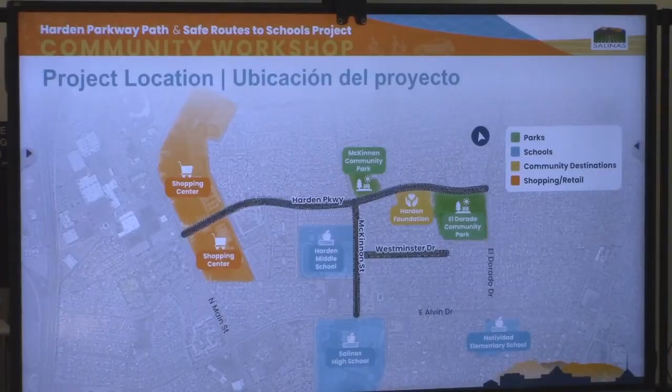This is the Harden Parkway Path and Safe Routes to School project. I'll start with an overview of the project. It does include all of Harden Parkway, from Main Street all the way to El Dorado Drive. And then it also includes McKinnon from Harden Parkway down to Salinas High School and Westminster.

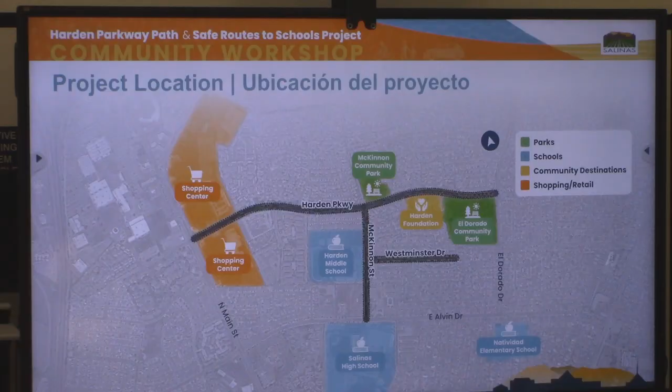North Salinas, right. So the project overview: this project really started during the development of the Salinas Safe Routes to School plan in 2022. During that time, Monterey County was also developing their active transportation plans, so I'll touch on those. We've got some really direct improvements that came from those plans. From there, we worked with the city to submit an active transportation grant application. Actually, this needs to get updated - we won more than 8 million, closer to 16 million, to fund the design and construction for this project.

Subsequently, we completed an intersection control evaluation. I'll go through the details of that, but essentially it's a benefit cost analysis looking at different intersection control types to see what would give us the greatest return on investment. We are currently working through the environmental clearance process and concurrently working through the public outreach and preliminary design. We did have an outreach meeting in October, and this is the follow-up to that. And later this year, we will be doing the final design for this project.

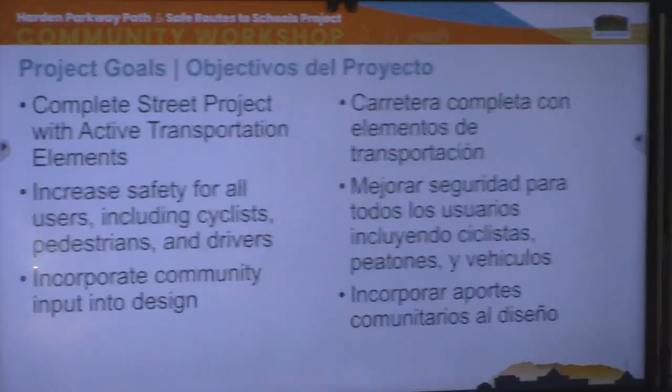So, project goals. As I mentioned, this is funded through the Active Transportation Program. As part of that, there are improvements geared towards cyclists and pedestrians, but we also want to consider drivers as well. So this is a complete street project, meaning we're addressing the needs of all users. With the proximity to the school, some improvements are right outside, so we really want to pay attention to the needs of students. During this process, we want to incorporate community input into the design.

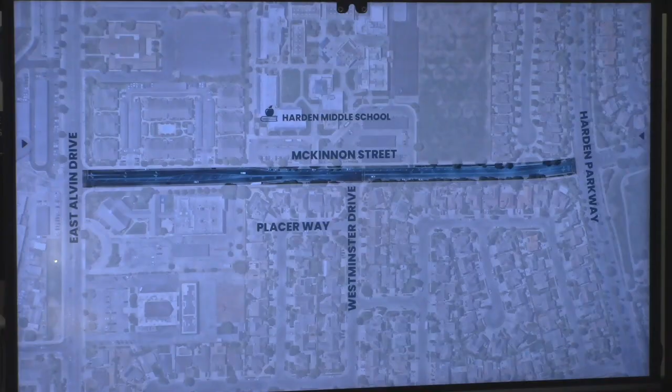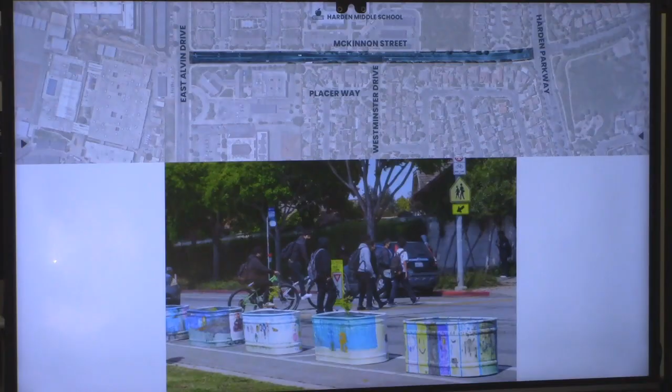So I'll go through each of the different segments. This is the segment out in front of the school on McKinnon. As part of the Safe Routes to School plan, there were some pilot installations, including raised planters to define the bike lanes and add more protection for students going to and from school. This is the existing cross-section, with bike lanes on the sides and a striped buffer. This project will make those permanent and protected, with an actual raised element to keep cars away from cyclists.

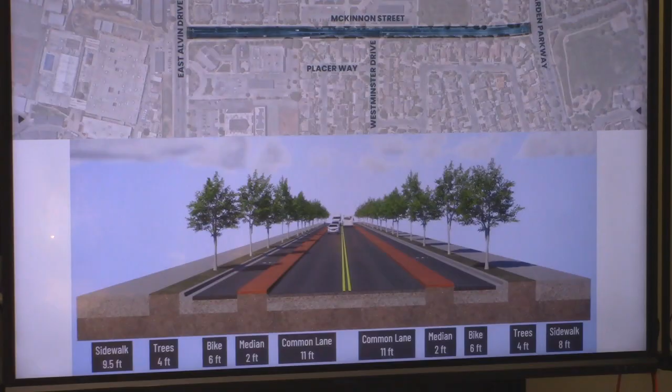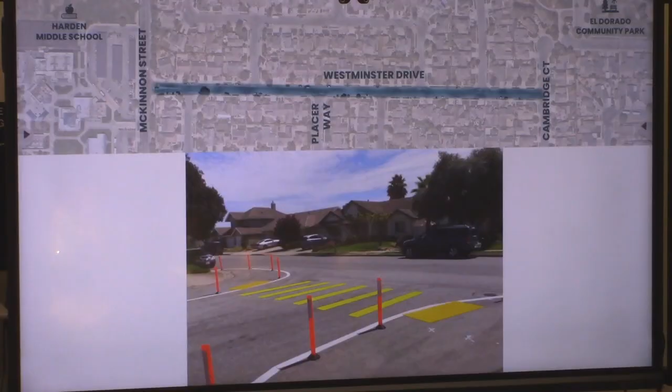The next area is on Westminster Drive, between the school and El Dorado Community Park. Again, as part of the Safe Routes to School plan, there was an installation of painted and striped curb extensions and high visibility crosswalks. These do a few things: they create shorter crossing distances, and the curb extensions also help slow cars down. This project will make those permanent as well.

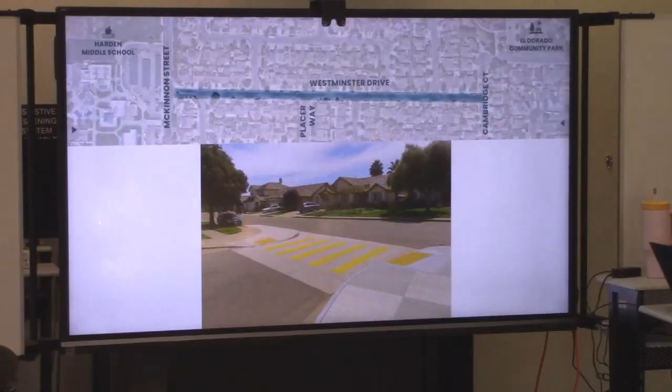And then finally, we come to Harden Parkway. This is the largest portion of the project. As part of the grant application, we included a single-lane roundabout at Harden and McKinnon, and also lane reductions along Harden. This is the existing roadway section now - you can see there's 2 lanes in each direction, a wide median in the center, and then 4-foot bike lanes on the edge.

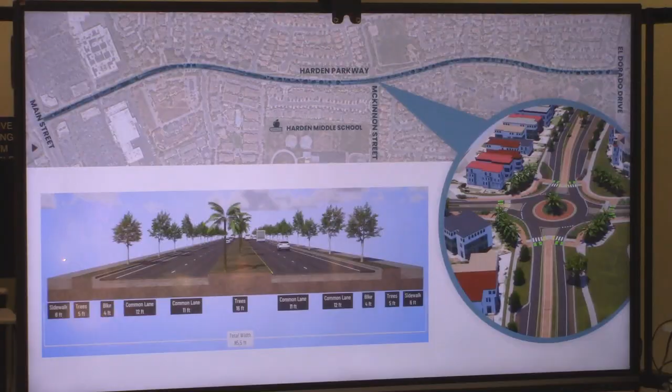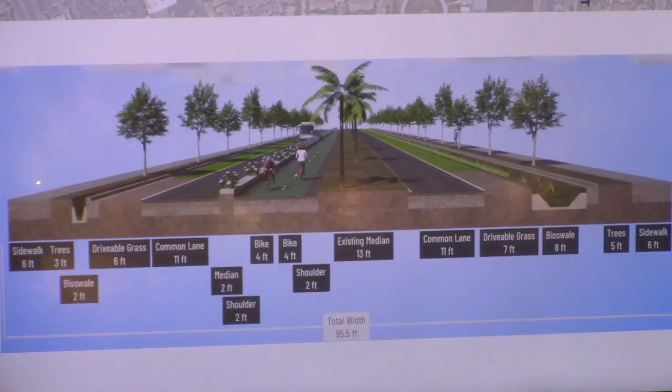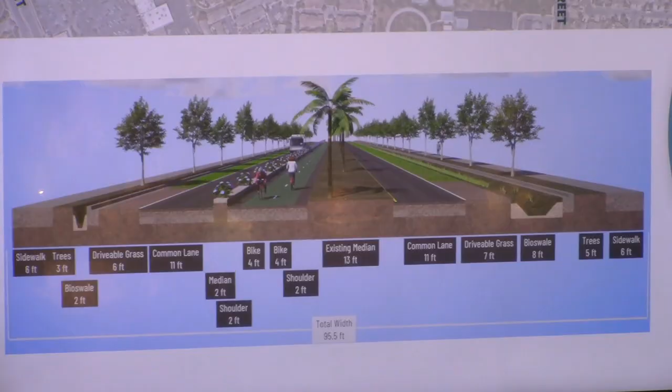With this project, what we're proposing is to reallocate some of the existing roadway space to bring in protected bike path and pedestrian paths. We'll be maintaining as much as we can of the existing median - we really want to be aware of those existing trees and keep the look and feel of the corridor the same. We'll also be incorporating stormwater treatment elements and some shoulder space so there's room for emergency vehicles to pass safely.

The way we set up this workshop is directly informed by previous outreach that we did. I have 2 sample questions here. The first is, what is your biggest transportation challenge along Harden Parkway? The biggest responses we got were traffic safety and congestion. The next question is, if you have concerns about roundabouts, which one best describes your reasoning? The largest responses were: I think roundabouts are not safe for pedestrians and/or cyclists, or I think roundabouts are confusing to navigate. The last one would be, I think roundabouts would negatively impact my commute timing.

So we have the stations set up throughout the room, and this is also how my presentation will go - these are all the things we heard from the public feedback. We'll go through our traffic evaluation, some videos on how to navigate the roundabout, discuss safety, and then at the end, go through our overall plans.

Starting with the traffic evaluation, as I mentioned, we did the intersection control evaluation. There were 3 scenarios we looked at. The first is the existing condition - we looked at keeping 2 lanes in each direction as a stop control and also as a traffic signal. We looked at it by taking away lanes also as a stop control and a traffic signal, and finally we looked at it as a single lane roundabout.

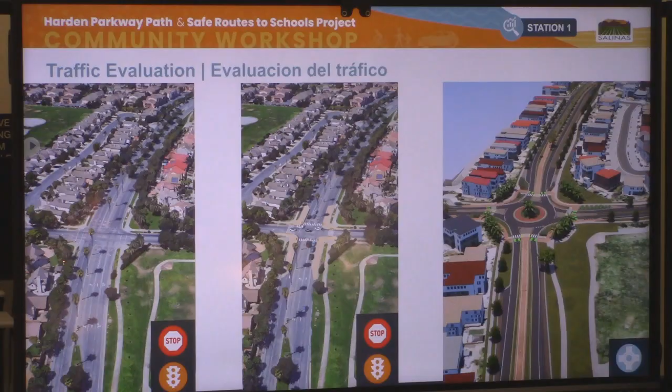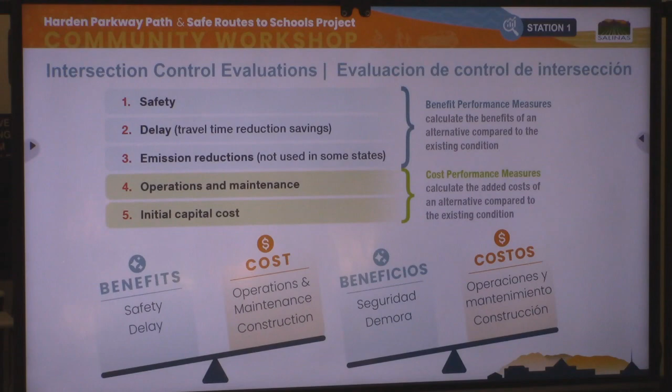During this intersection control evaluation, we're looking at the benefits of safety and delay, the monetized benefits of safety and delay as compared to the cost of operations and maintenance. So it's really just, are we getting enough safety and delay reductions to outweigh the cost for installation and future maintenance for the project?

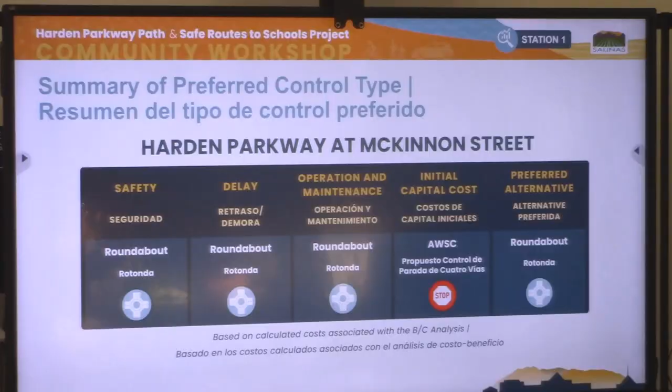Across the board, we saw that the roundabout was the preferred alternative, except for the initial capital cost, which is the all-way stop control, which doesn't cost anything because it's remaining the same. But we wanted to go a step further.

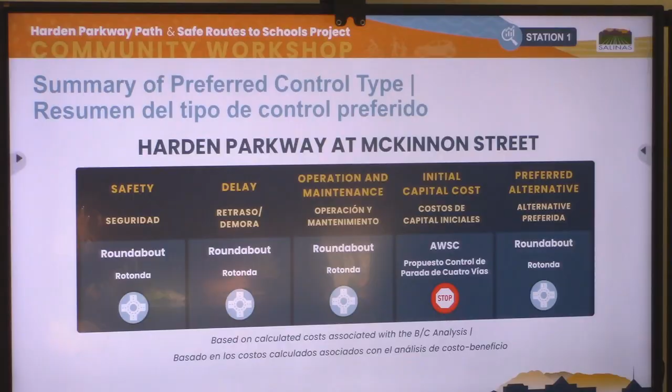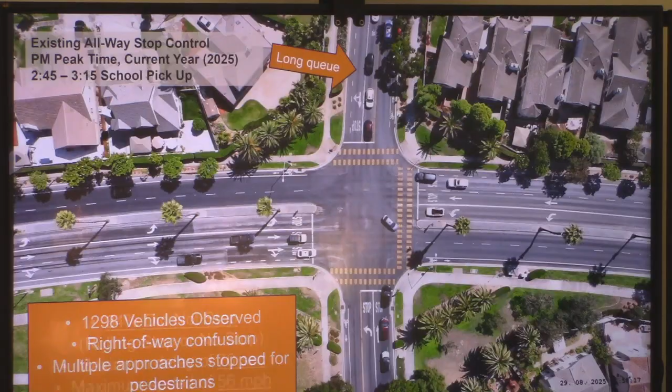So of these 1,300 vehicles that we saw, 34% did not stop - a third of cars did not stop. It was either a rolling stop or just blowing through the stop sign.

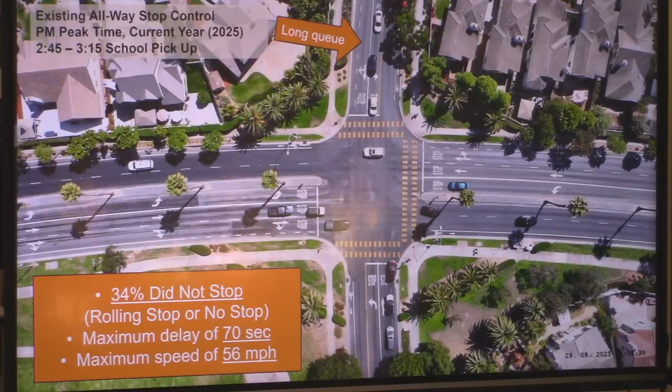We also saw a maximum delay of over a minute. That was someone trying to make a left here from this north leg because of all the other cars crossing or because of the pedestrians. They ended up waiting there a very long time.

And then this is probably the most alarming - the maximum speed at the intersection was 56 miles an hour, and that's just within the limits of this drone video. So you can see even with the stop control, people can speed.

You're not kidding, it's like a race track. Yeah, we saw a lot of that.

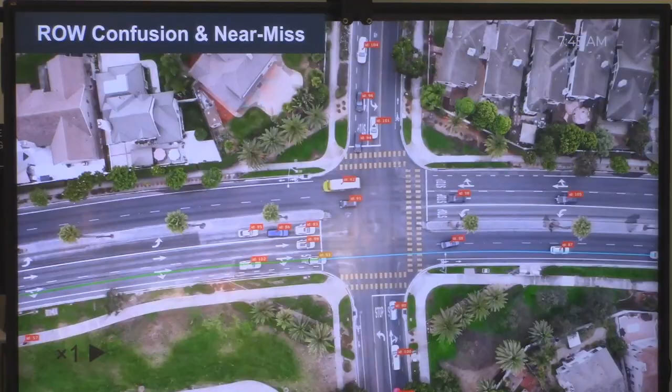This is just another video, so you can see the right-of-way confusion that I'm talking about. This car is pulling up here. These two cars then approach the intersection at the same time. They're both going at the same time, and then the vehicle traveling south ends up having to slow down to allow the other vehicle to pass.

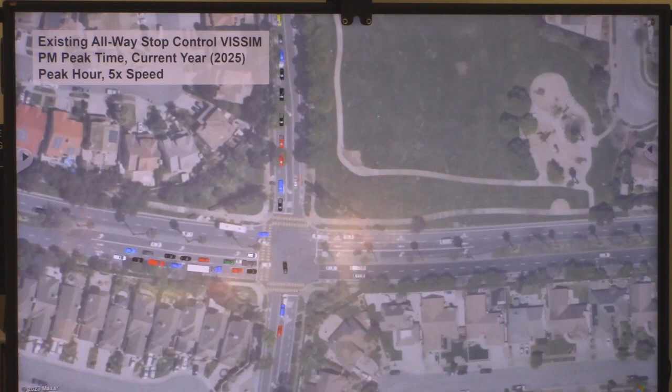So we took our actual in-person drone data, we also took our count data, and we created this really comprehensive computer simulation that models both the existing intersection as well as the roundabout alternative. I'll go through some of the results of these.

With this configuration, we saw an average delay of about 36 seconds, an average queue of about 250 feet, and then again, we're having those same instances of pedestrians having to cross over 90 feet, and then also the issues of right-of-way confusion.

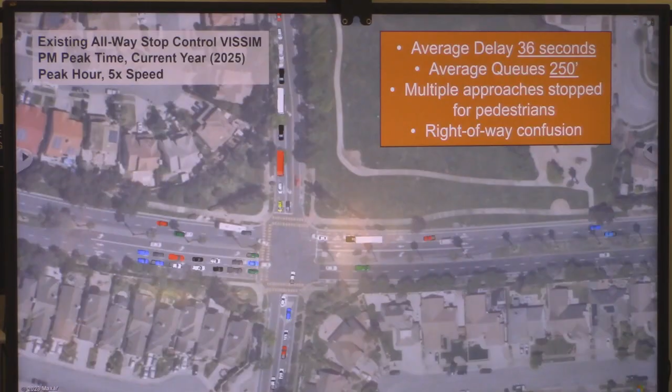These are at 5 times speed, by the way. So this is with the roundabout alternative - again, this is with the lane reductions with a single lane, same exact period, same amount of cars. And we're seeing an average delay of 10 seconds.

So that's a quarter of what we would see with the stop control. The average queue is about 30 feet. When we do see a queue building up, you'll see that it dissipates really quickly, and that's just the efficiency of the cars moving through.

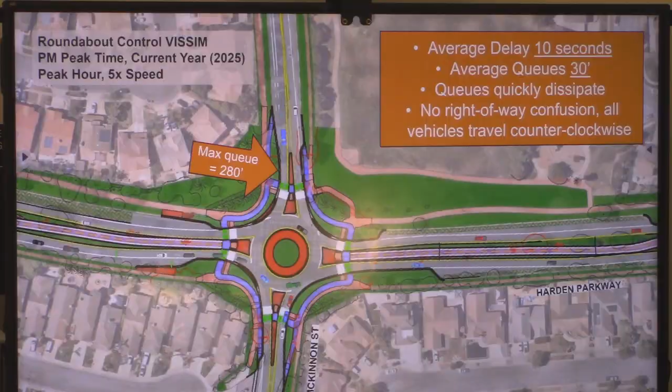So some of the results - easier and safer to make left turns, especially from the side streets. So for this one, we'll take a look at Ercia. This is going to be to the east of the Harden McKinnon intersection.

Right now, if you are exiting, you have to cross two lanes of traffic. It's also really difficult to see cars approaching from the west side, or excuse me, from the east side.

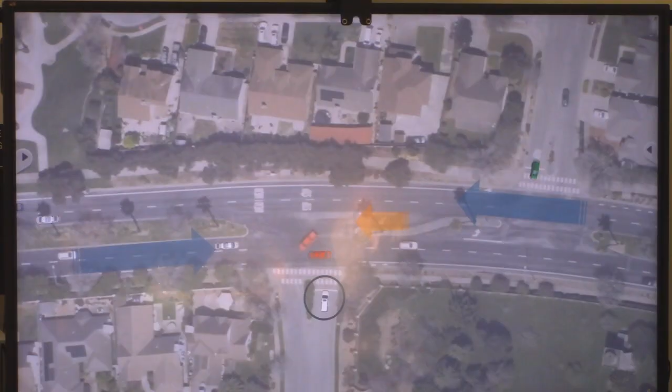So we'll look at an example here. Again, this is our computer simulation. The car comes up, they have to look for traffic approaching from the west. They have to look at this left turn pocket, and then they also have to look at cars approaching from the east. Again, this one making the left.

We didn't intentionally pull this, but you can see if the vehicle is making a lane change there, it's also really unsafe for that left-turning vehicle to then pull in. So you end up with a lot of unsafe movements and conflicts.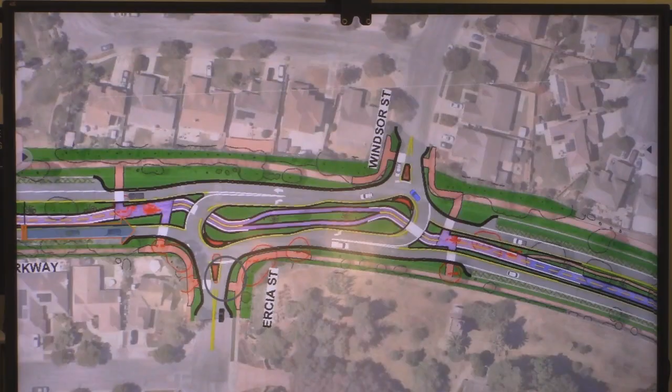This is, again, the same scenario with the roundabout. We'll see our vehicle approaching, and you only have to look for approaching vehicles in one direction - everybody's going the same direction, just look left. So with this layout, what we would do instead is have everyone make a right turn, and then they're able to safely get through the intersection.

We're also seeing lower, more consistent speeds. As we mentioned, it's a bit of a raceway right now - it's really wide, we're seeing vehicles going 45, 56 miles an hour. What happens is people are traveling really fast along most of the corridor, and then they get to Harden McKinnon and hopefully stop. We're seeing at least a third of them don't. And then they get through the intersection and then they speed up again. So your overall travel time may remain similar, but you're going much faster and driving more unsafely.

With the roundabouts, everything's a lot more controlled, so you're able to proceed through the corridor at a consistent speed.

With all this analysis, we found a 13-second reduction in delay in the morning heading eastbound, and an 11-second reduction in the afternoon. We saw slight increases for westbound traffic, 5 and 10 seconds. So overall, we're seeing a net reduction in delay for the corridor.

Now I'll walk through how to navigate. These slides are using the roundabouts in front of Barden Elementary. First, the vehicle will approach, look towards the yield line, look towards the crosswalks, and prepare to yield as they approach.

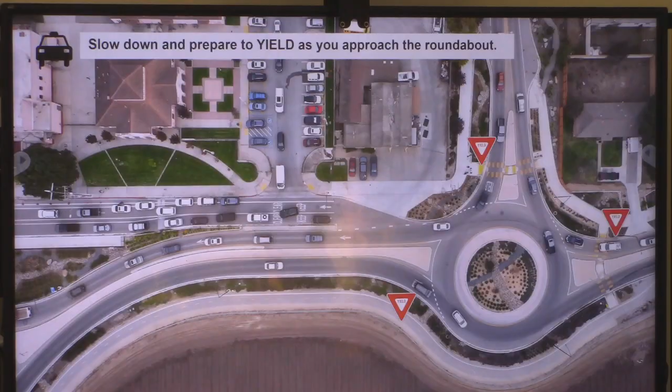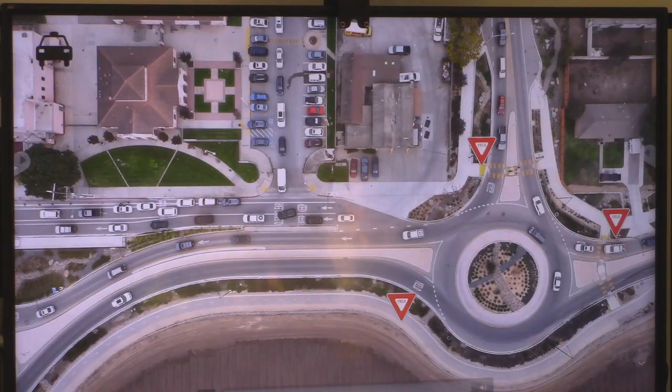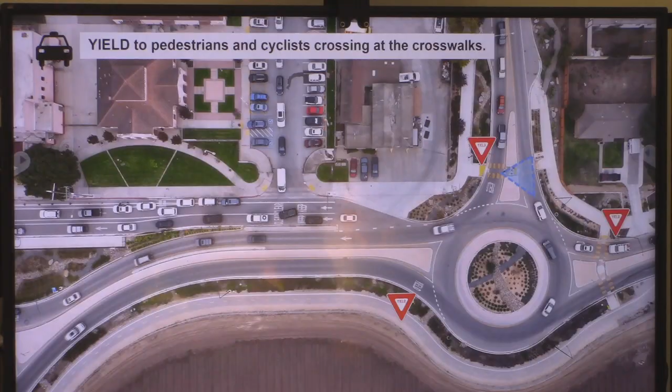Then if there is someone waiting at the crosswalk, the car would yield and let them cross. We also see drivers, as they're exiting the roundabout, will see the pedestrians as well, and there's enough distance between the crosswalk and the circulating lane for a car to safely stop and allow the pedestrians to proceed.

Now we'll focus on this gray truck. There's no one in the crosswalk, so they can proceed through. Once they get to the yield line, they will look to their left and see if there's any approaching vehicles. Vehicles in the circulating lanes do have the right-of-way, and then they can enter when it is safe.

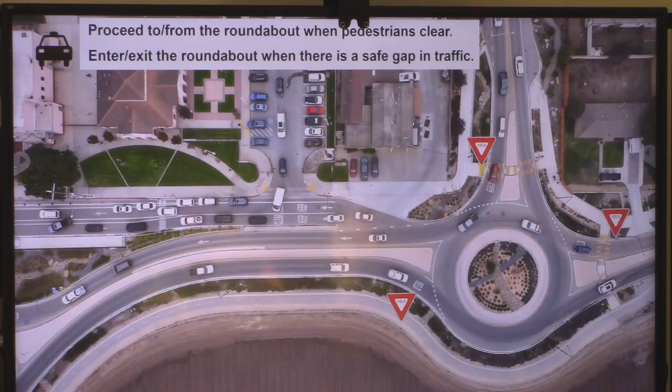So again, we see the vehicle approaching, and they're going to yield to any vehicles in the circulating lanes.

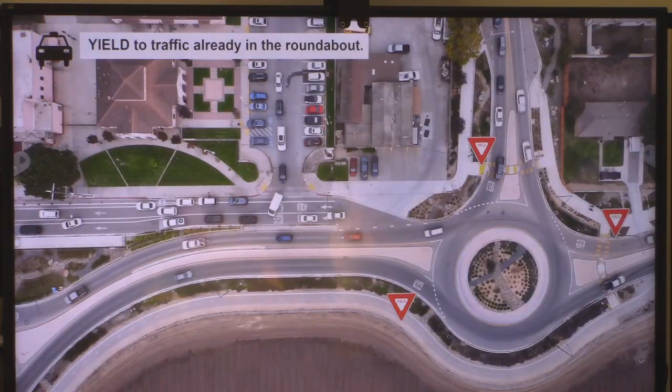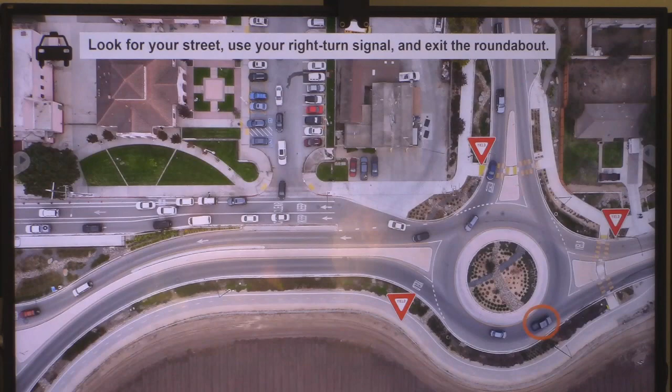And then lastly, we'll focus on this truck. You'll continue through the roundabout in a counterclockwise direction, then look for your street, use your signal, and exit the roundabout.

Now on to safety. I know this is a big topic, so we'll go through each of these bullet points. Why are pedestrians and cyclists safer at roundabouts?

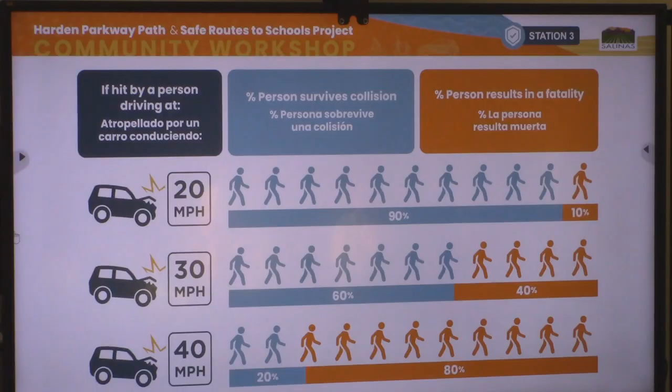The first reason is lower traffic speeds and less severe collisions. I touched on that earlier, talking about the travel times through the corridor. When we design our roundabouts on the approaches, we design to 23 miles an hour or less. It's sort of like a speed bump where you've got that vertical deflection causing you to slow down. With the roundabout, we're doing that horizontally, and that's forcing vehicles to slow down.

We also look at fast paths, making sure there's not a straight line for a car to just drive straight through. What does that mean for us? This chart shows the chance of a fatality based on a vehicle's speed. At 23 or 20 miles an hour, that fatality chance is 10%. In the existing corridor today, we're seeing vehicles at 56 miles an hour, which is over an 80% chance of a fatality if a pedestrian was struck.

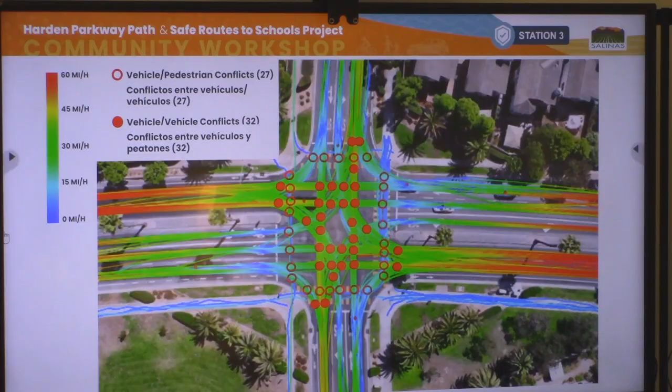I also want to point out on the side there, it shows you what the colors mean. Red is 60 miles an hour. Like I mentioned before, some of the vehicles, as they're getting towards this exit crosswalk, are up in that 60 mile an hour range.

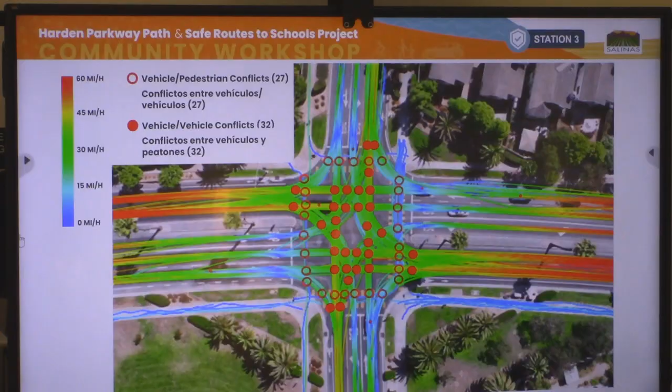With a roundabout, rather than those 27 and 32 conflict points, both of those drop down to 8. So the places where you're going to have conflicts between pedestrians and cars, and between vehicles and other vehicles, go down to 8—it's a huge reduction.

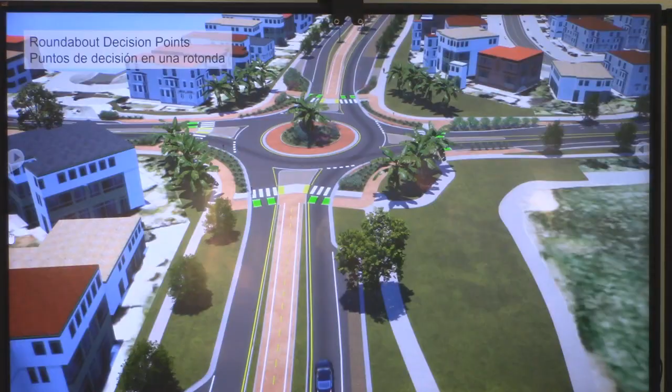The last safety point is clear decision points. As you're approaching the roundabout, you have a clear view of the intersection. We also orient the vehicles so they're aimed a little left of center, giving a good view of approaching vehicles. On a typical roundabout with bikes on the sides, we'd position the bike entry to take the lane so vehicles know how to stop. For this corridor, we're putting the bikes in the center, getting rid of that conflict point.

The vehicle approaches the intersection and can look ahead to see if any pedestrians are waiting to cross. Here there's a pedestrian in the center, so the vehicle slows down and allows them to cross. They continue to the yield line, where they have enough room to stop between the crosswalk and yield line, look left for approaching vehicles, and continue through. On the opposite side, there's room to stop for pedestrians crossing, then continue once they've crossed.

When we look at stop controls, like the existing intersection, the vehicle comes to the intersection, stops, has to look across the street for approaching vehicles from the other leg, and also needs to check the crosswalks for pedestrians—all happening at one location, one moment in time, making all these decisions at once.

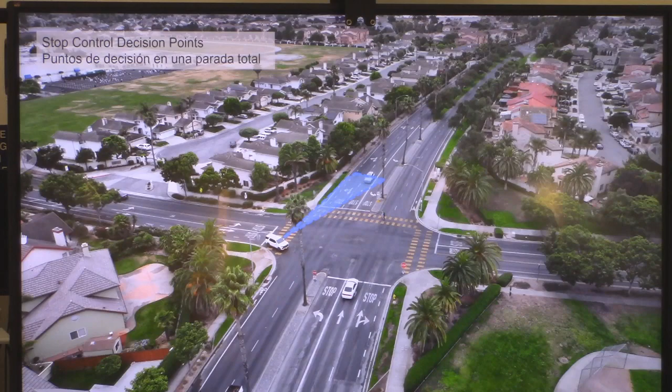One of the most dangerous movements we see is actually when people are making right turns. You're looking left, but there may be pedestrians crossing to your right, and that can be a very dangerous movement.

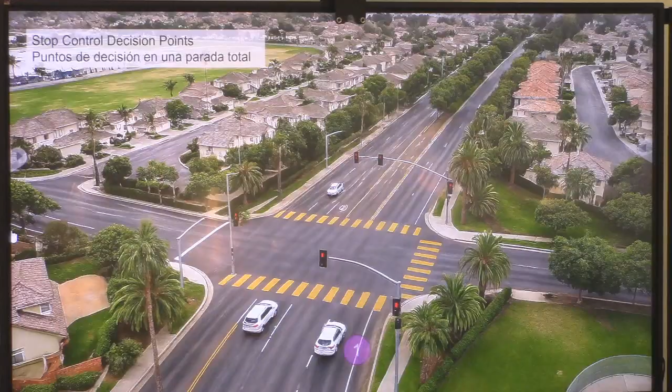Very similar with a traffic signal—you're looking at the lights, still checking for approaching vehicles, and you have to look at all the crosswalks.

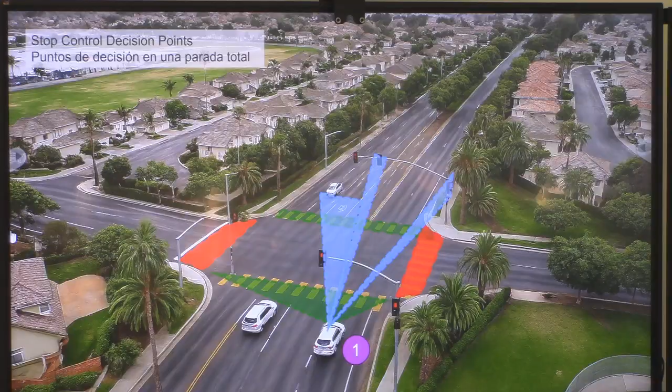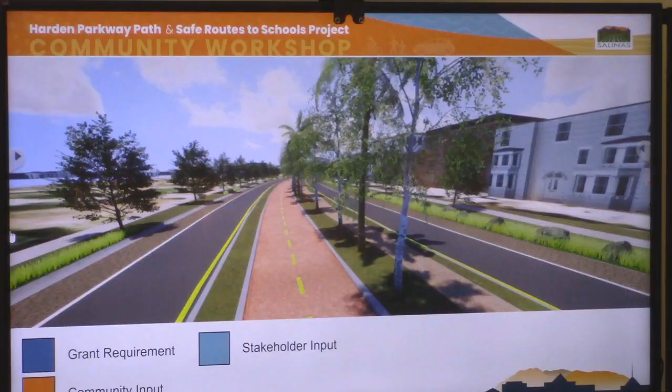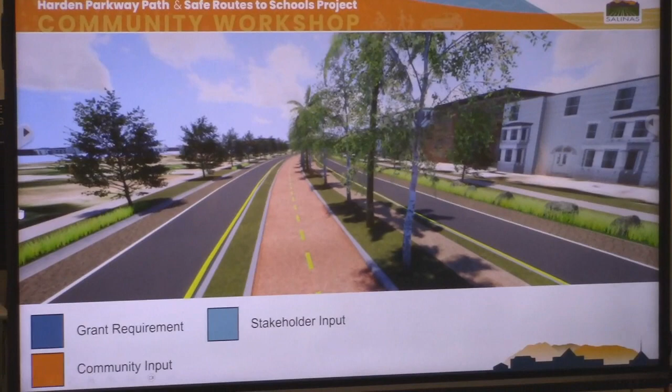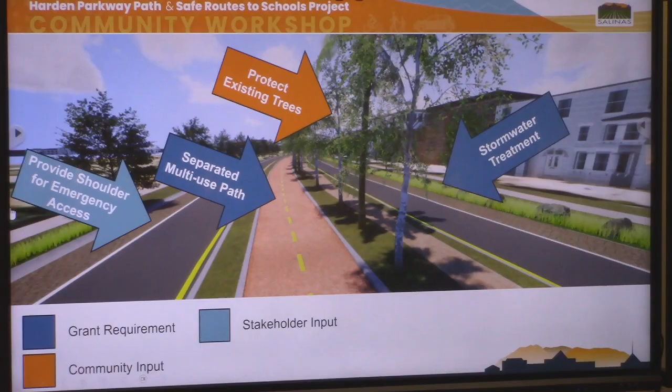Some things we wanted to include as part of this project were grant requirements, community input, and stakeholder input. The first is providing a shoulder for emergency access, based on initial feedback working with the fire department. Then our separated multi-use path comes from the grant. Protecting the existing trees is something we heard from the community. Stormwater treatment is also tied to our grant funding, and addressing safety issues through lane reductions is also part of the grant to create that complete street.

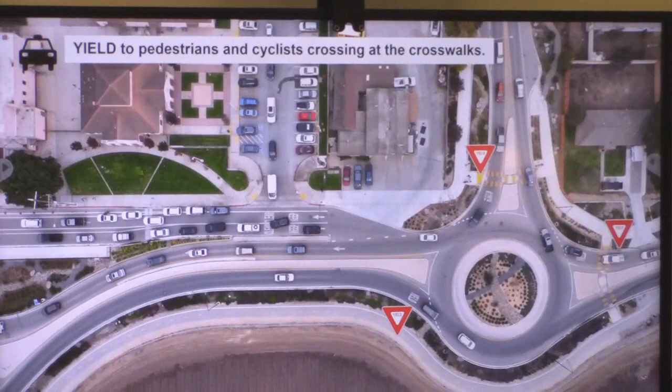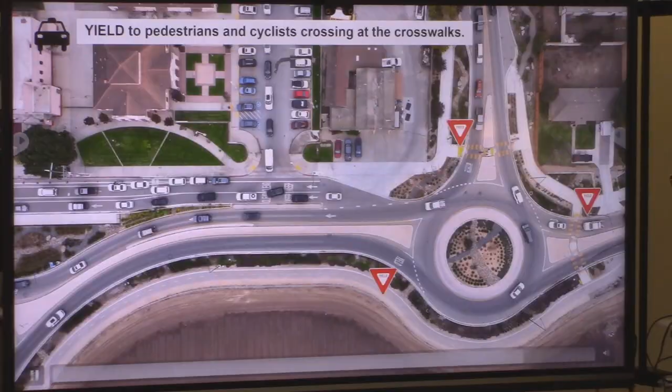And I think it's important to see this is similar size, similar roundabouts, similar community. Well, it's still your community, just in the south part of Salinas. So we have before videos, what we like to call highlight reels, of parents behaving badly—going out there, stopping erratically, making unsafe U-turns, stopping in unsafe places, sending their kids out, parking in the middle of the street. Some of the residents just off the screen on Rubber Street had cars in their front yards because of excessive speeds in the northbound direction.

Talk to folks now, talk to the school—they love this. The residents out there love this. It's brought a lot of order out of the chaos. So I suggest this is a great example of going out and driving and experiencing what's going to happen with what we're proposing at Harden and McKinnon intersection. It's really the same thing, similar size, it's out of a school. You can argue there's a lot more parents, a lot more traffic, a lot more kids walking in this area. So I suggest you experience that.

So, you know, we're not the first ones to come up with roundabouts. Other cities have them, and I've been through some of those cities that have them.

But if you look at their roundabouts, I mean, it's nice. I'm not going to argue with that, it does work. But you know what? They're twice the size of what you guys are building here in Salinas. So it makes a difference, because I drive around town all the time, and this is my route to Target, a mall, Safeway, or whatever, and I go through a stop sign. I get what you're saying, but to put a small intersection in there, it's not going to solve the problem. All you're going to do is push people away so they don't go through that place anymore. So we're not solving the problem, we're shifting it somewhere else. So these aren't minis, I do want to say that.

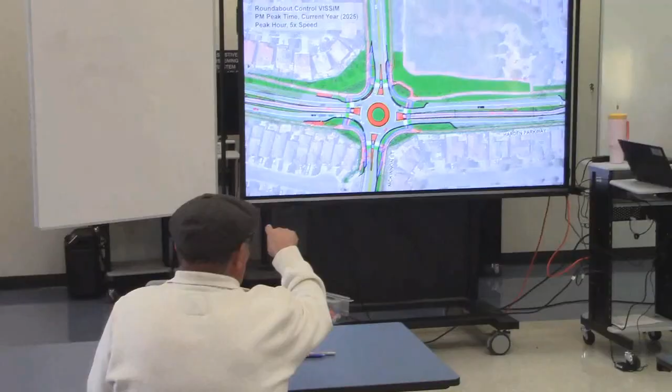What I'm looking at, thinking in my mind, is right now, this here is going to be able to handle how many vehicles? Keep the flow going, okay? I don't know how many you have in mind it's going to handle. This simulation is with the existing traffic that's there. Remember, we got some more homes coming, 500-600 homes more coming in the future, and it's going to be more impact and get more vehicles. Sure. Is that going to handle the load? That's why I'm asking, how many vehicles do you think it's going to handle?

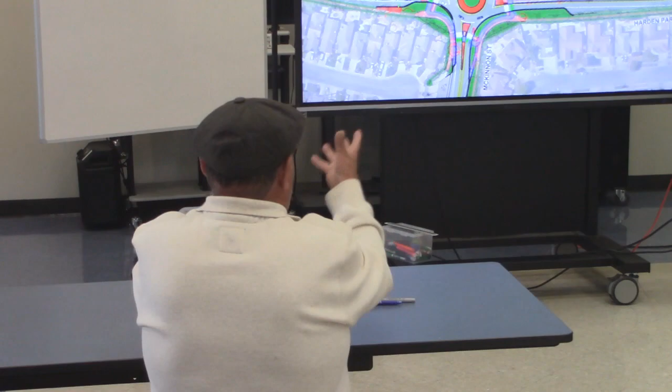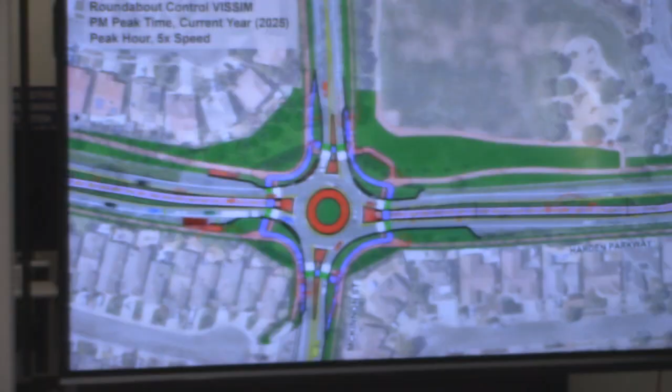With the existing intersection, we're seeing level of service D and C. With the single lane roundabout, we're seeing level of service A. So even with the addition of the growth and additional houses, it would still have a better level of service than the all-way stop control. You get some queues that pile up, but the average delay you're experiencing at the intersection is 10 seconds. So even when we get those queues that start piling up, they dissipate really quickly. With the stop control, we were seeing average 40 seconds, maximum over a minute waiting at the stop sign, and the queues were 700 feet.

And then the other thing is, safety-wise, in order for that to work the way it's planned, we need to have officers really patrolling the area, making sure everybody's following the rules. And if we're short of officers, it's going to be a mess. That's what I'm concerned about - the need for officers near the intersection.

The beauty of the roundabout, like I said, with that forcing physical deflection, it forces the car to slow down. With the stop control, we saw over a third of people not stopping - it's just the sign, just the light, there's nothing physically encouraging drivers to slow down. So even with a lack of officers, you're going to have that necessary reduction in speed.

I heard a comment that people aren't going to stop for the kids. If they're not stopping at this stop sign now, the other nice thing about roundabouts is that as you're approaching the crosswalk, you're right there with the kids - you're able to make eye contact. So people can blow through, but you've got that pedestrian refuge area for the kids to stop. We've also seen the big hordes of kids coming through, and we've done those evaluations, and we have examples of schools afterward where that is happening - we're seeing the drivers stop, or the hordes of kids just going across, and nobody's going to drive through that.

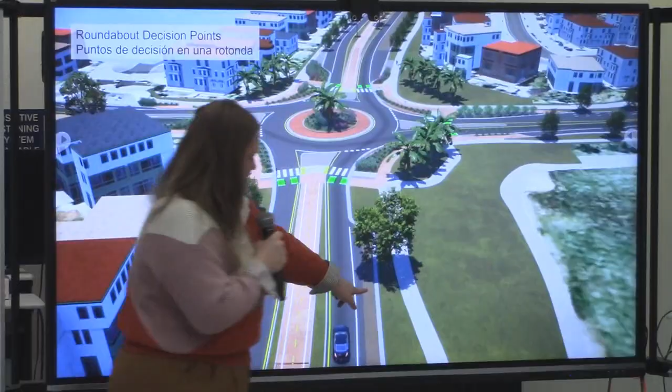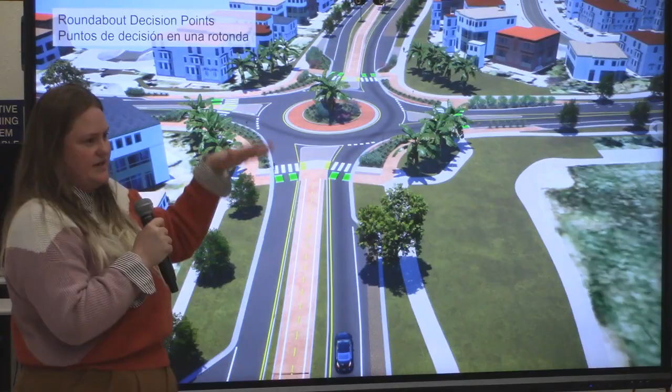And then your second question was about emergency response should there be an accident in the roundabout. Yes, so this is where it actually narrows down to 11 feet. This is where we have our shoulder, which is to allow for emergency access. It does get narrow to 11 feet here, but this truck apron is minimally at least 12 feet, and that's really easy for fire trucks to go in and mount. We only have a 1 to 2 inch face on that curb with their giant tires, so it's nothing to overtrack. That's how they could get through there.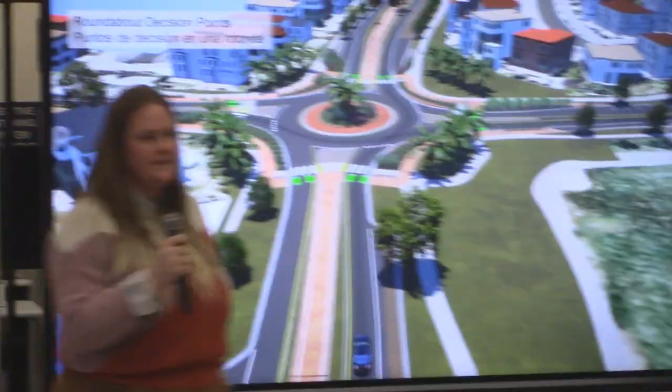I'll add to that, we have some graphics that we can provide to the city to use in the future on how to drive it. We have it, showing what to do at a single lane roundabout when there's an emergency vehicle, and what the rules of the road are. That's an older one, but it's common sense.

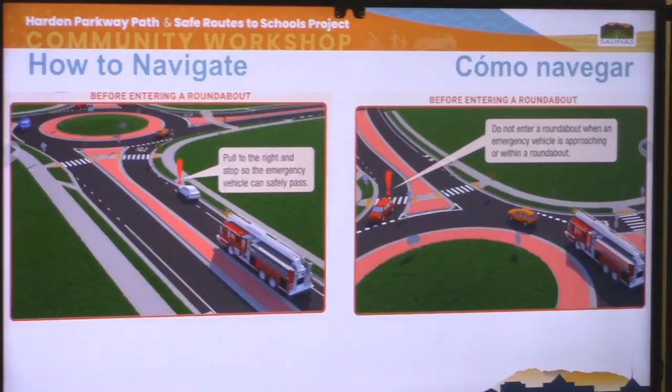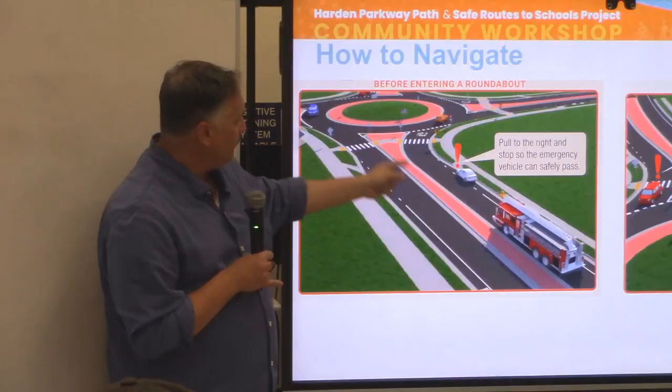If you're in there and there's no place to pull over, you go through the roundabout and then pull over. It's just like a signalized intersection, you're not going to stop in the middle of it. You've got to get to a safe place, pull over, and let the emergency vehicle go. If you're on the cross street and an emergency vehicle is coming, don't enter the roundabout. Or if you're in the circulating lane and an emergency vehicle is coming through, stop and let it go. It's the same rules of the road as a normal intersection.

One of the key benefits here, based on the safety feedback we get from first responders for roundabouts, is that during response time, one of the most dangerous moments, especially for fire, is navigating a signalized intersection with lights—having to stop, make sure the intersection's clear, and then move forward. With a roundabout, it just simplifies those movements.

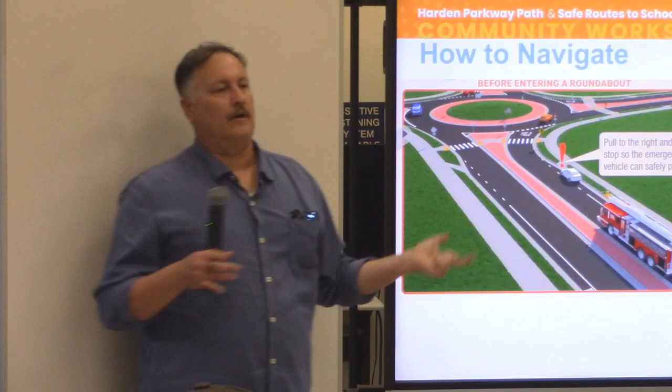It's very easy, you only need to worry about if somebody's coming from the left, or cars getting out of the way if somebody's coming from the left. That's all that's needed, so you don't have to come to a complete stop to enter the intersection and make sure all the cross traffic isn't coming through. They're also spending less time responding to severe collisions at these types of normal intersections as well, so just something to think about.

I'm not sure who this is. I'm just gonna start working over from the left.

Did you consider the same 4 lanes with a signalized intersection here and do computer simulation to see what that does as far as controlling it better than the stop signs?

Also, I wasn't clear on whether bicyclists do not go into the roundabout, that they have to go from the bike lane, I guess it's in the center now rather than on the side, get off their bike, go across a couple of crosswalks, and then back into the center and go on. Is that true?

And the last thing on safety, I know these are in a more residential area, but they're not always as safe as what you are portraying, with the 3 fatalities that just occurred in January in the same roundabout within 3 weeks on 156 near Hollister. So it does happen. I know you're saying all these angles and conflict points, but there are fatalities, and these were vehicular fatalities, not just pedestrians or bicyclists. So that were the 3 questions.

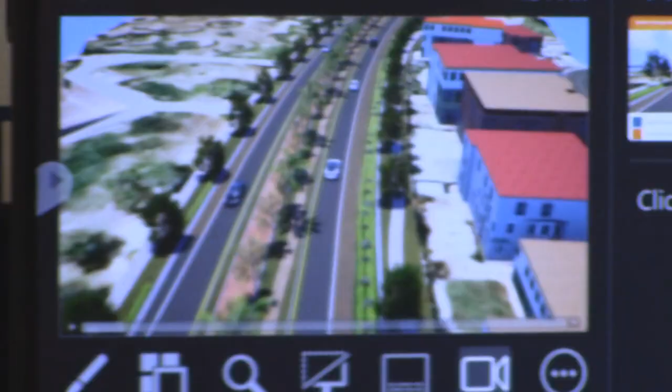No, it was at a conventional intersection. Yes, this is fine. Real quick—

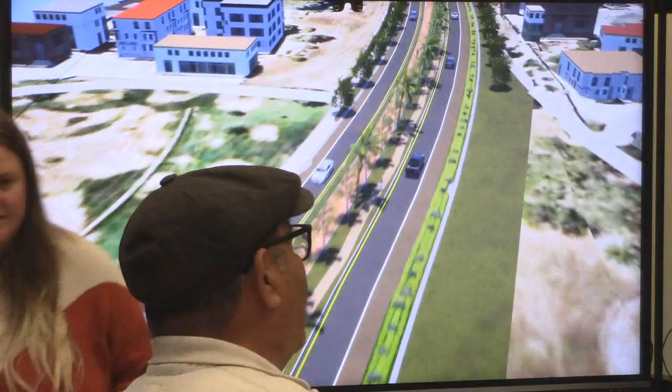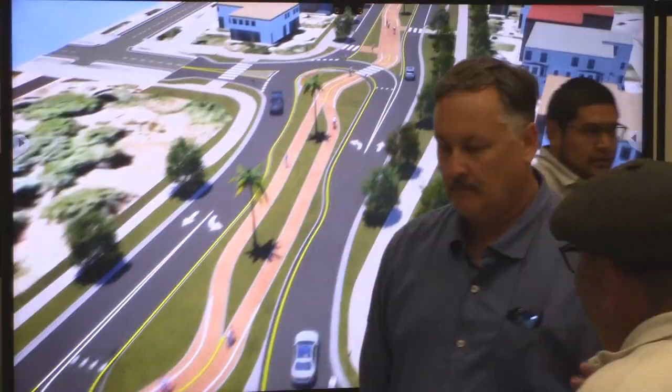If I may add, I know there's quite a few talking. If I can get your attention—

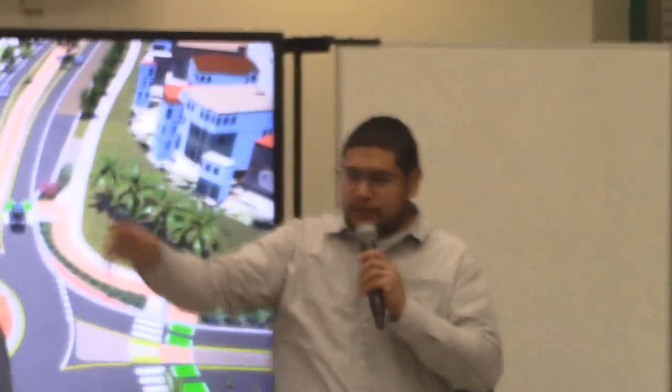We do have the road plot, which is a printed map of how the corridor will look. I know we have the rendering playing here, but we have the road plot, which is a hard copy. Please provide your feedback on the post-its about anything within the corridor, the design, the concept, the look. We have post-its and pencils to leave your comments written on the map, and we're also here available for additional questions.